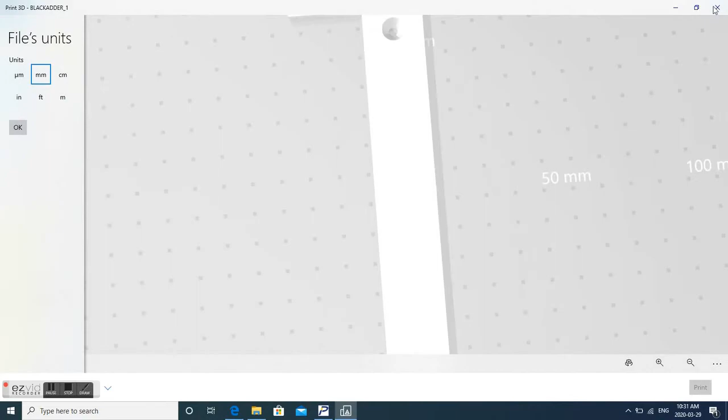In today's video I will show you how to create numbers and letters for the use of your address or something, into a 3D model, and doing some 3D prints.

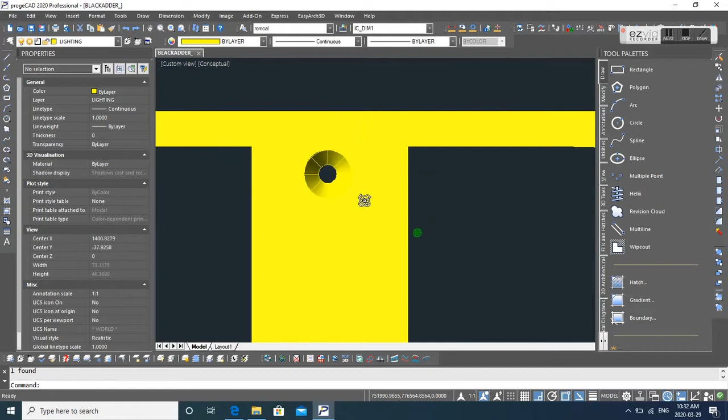Basically I already did a lot of 3D numbers and letters, and that was, if I'm not mistaken, 6 years ago. Let's try this Blackadder. Is that a Blackadder or something? Fonts.

So basically I did 3D print and put holes for the screws.

My idea is using plastic numbers instead of a usual metal, putting on your house a colorful plastic instead of a metal, because metal you can use anywhere, like if you need strength, use metal rather than plastic.

So basically these numbers and letters in your house, you don't need strength in this one. It will sit there like 100 years, or while your house is still standing.

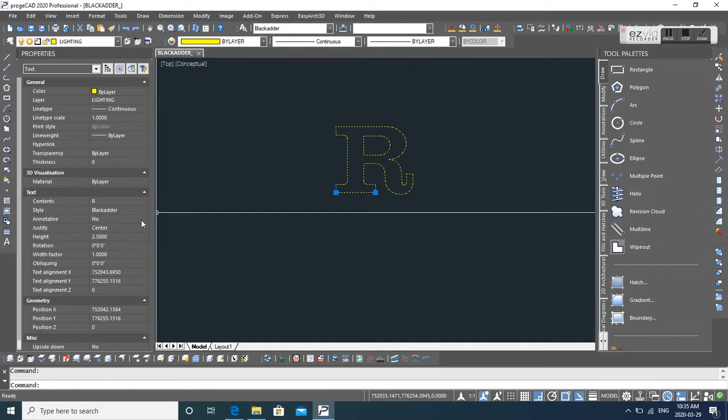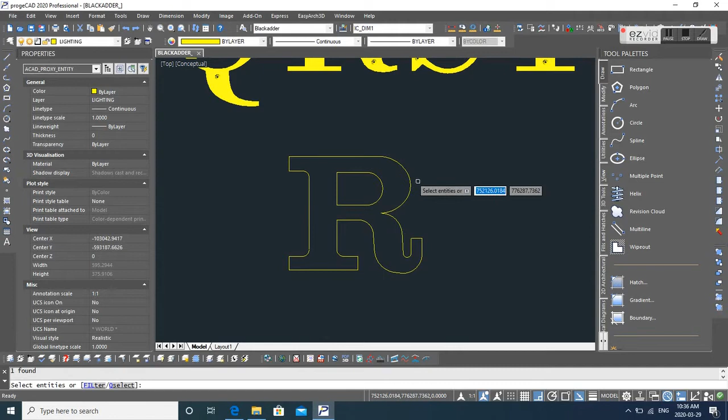Okay, so I changed the font, and I'm having trouble connecting this polyline into one entity. So I need to flatten it, overkill, to delete the duplicate lines before extruding this, because it won't turn into a solid if it's not connected, right?

So this is one of the easiest things or models that you want to do, and useful. And what else? Durable, I guess, because it's not actually moving, or you don't need strength on this.

When you screw it into the wood, it's not gonna move. No one's gonna hang in there.

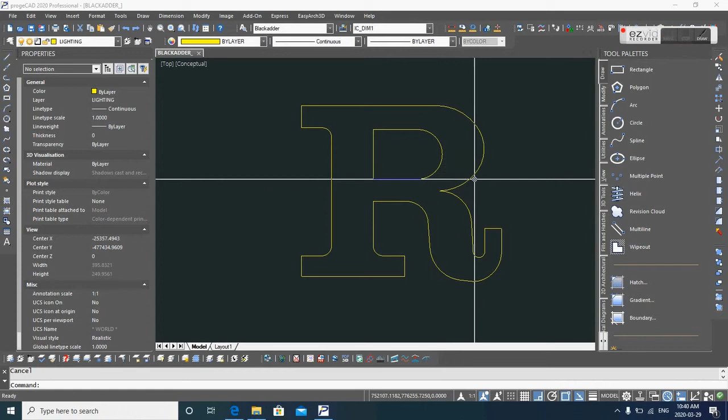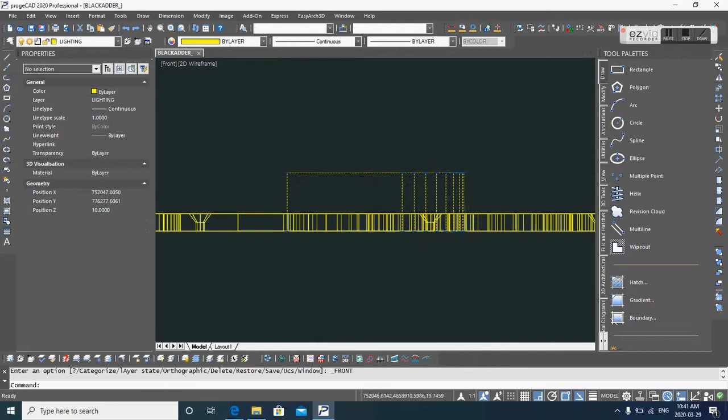Instead of throwing plastic away to the sea, to the ocean, or to the drainage, why not use this in the most reliable, non-forced homes, doors, cabinets, anything.

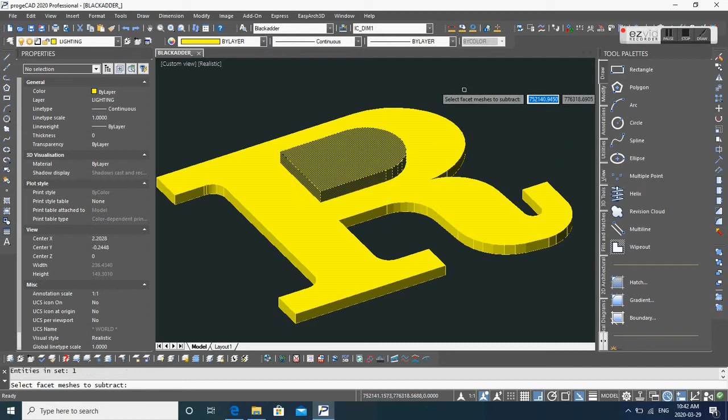Yeah, it's not gonna stain. You can't ruin it, since it's just attached to a wall, to a wood, right?

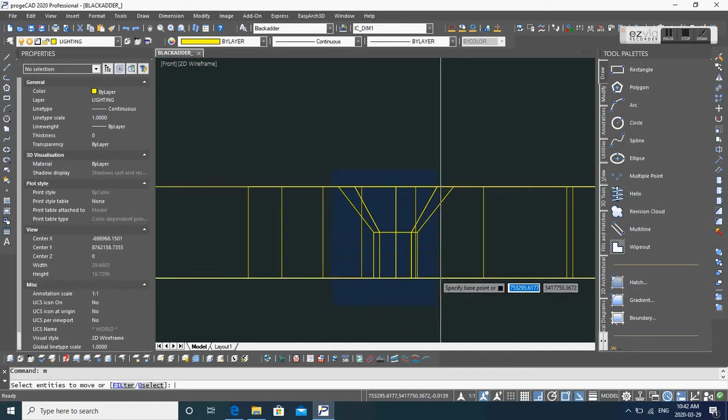So yeah, this is my first idea when I started doing some research, when I knew the 3D printer comes out.

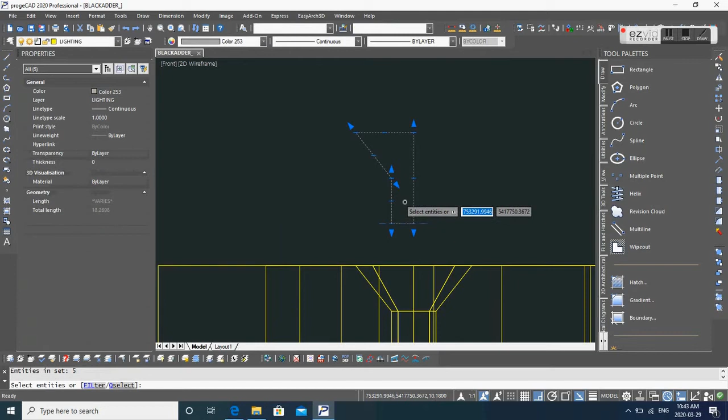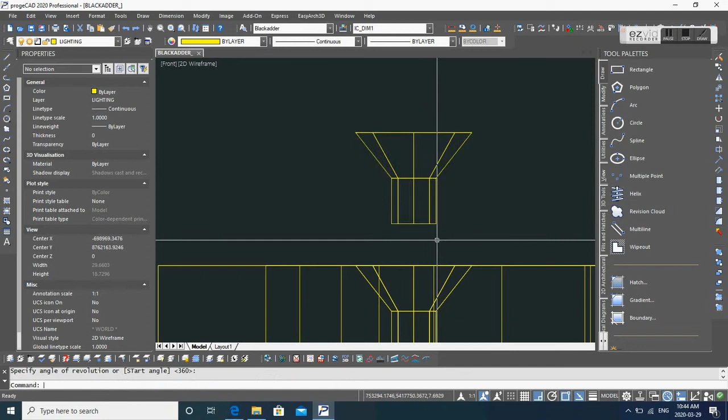So yeah, I have hundreds of files, I think 5 different fonts with different numbers and letters, so you can choose whatever you want that fits your needs, or whatever your request or thinking that might fit the design of your house.

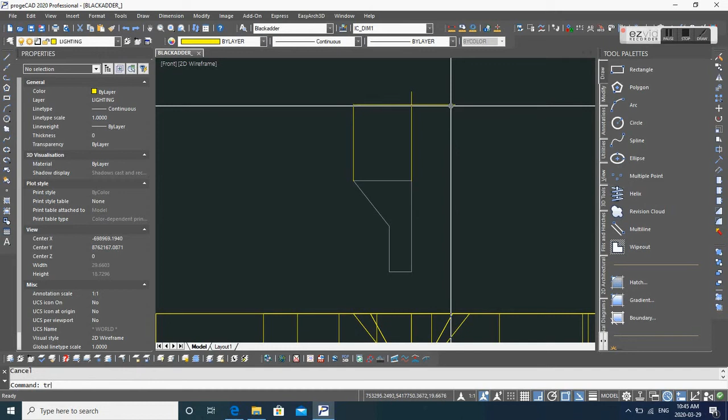Your cabinets, doors, like putting names on office doors or something - you can use glue to stick it to the wood, just like a lamicoid for industrials, right? They use plastic for naming a cabinet, putting drawing numbers in it.

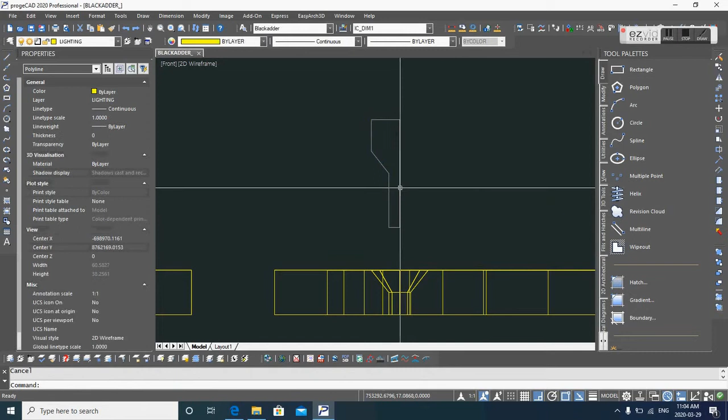So okay, right now I'm working on this solid object, just to subtract the letters and numbers that I have and put holes in it, so when you stick a screw,

it's not hanging out on the surface of the front letters. Yes, and

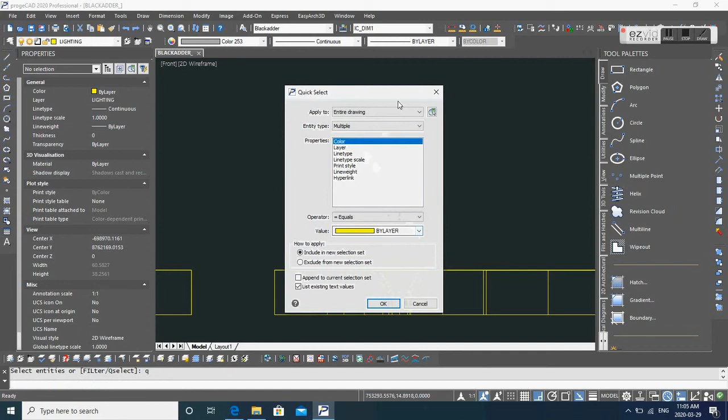what else? So I need to revolve this object. I'm trying to overkill the lines, delete the duplicates, and then join through polyline edit. So basically, let's go back to the plastic compared to metal.

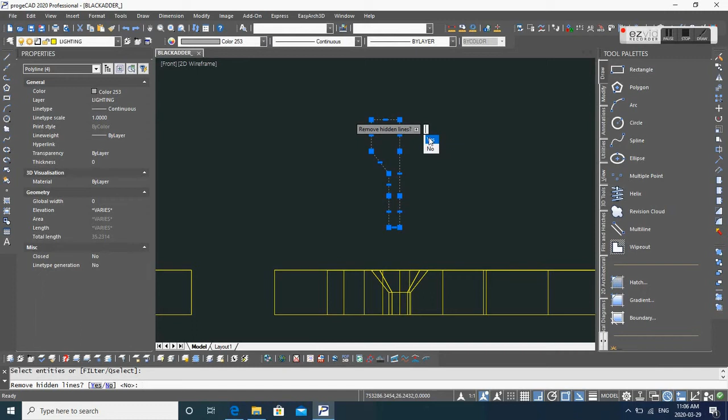So metal can be used for durable things, like chairs or something, right? But plastic, you still need to forge it and make it flexible to use on those kinds of equipment or furniture or something.

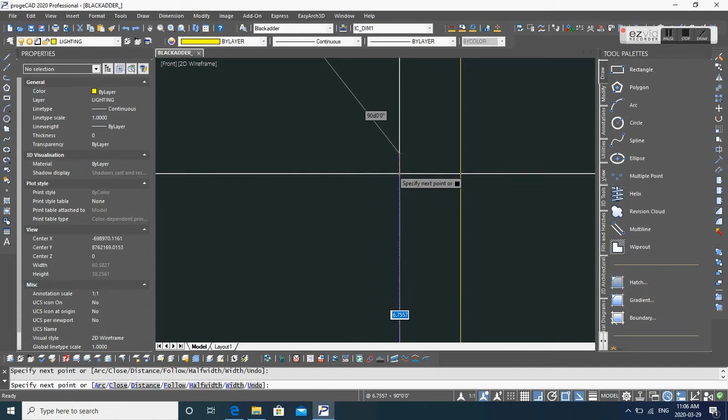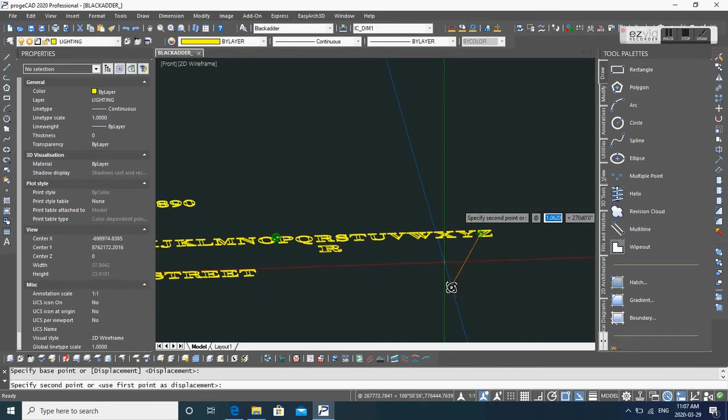And yeah, so indoor, outdoor, plastic is durable. Let's not throw it in the ocean or destroy our environment.

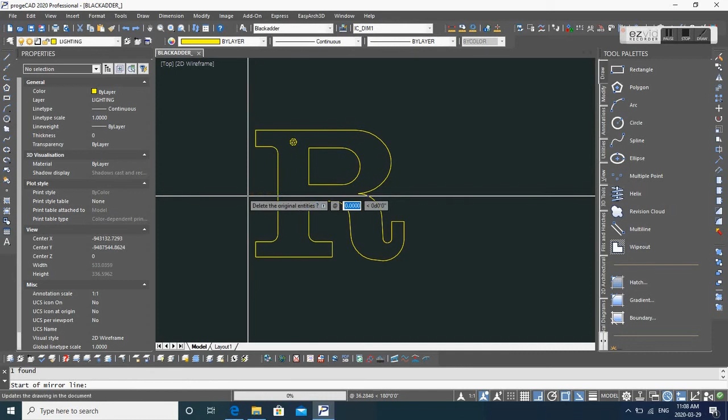Let's think of something that will be useful, but then again, it's not a waste. It's actually beautiful because of the colors, different colors, right?